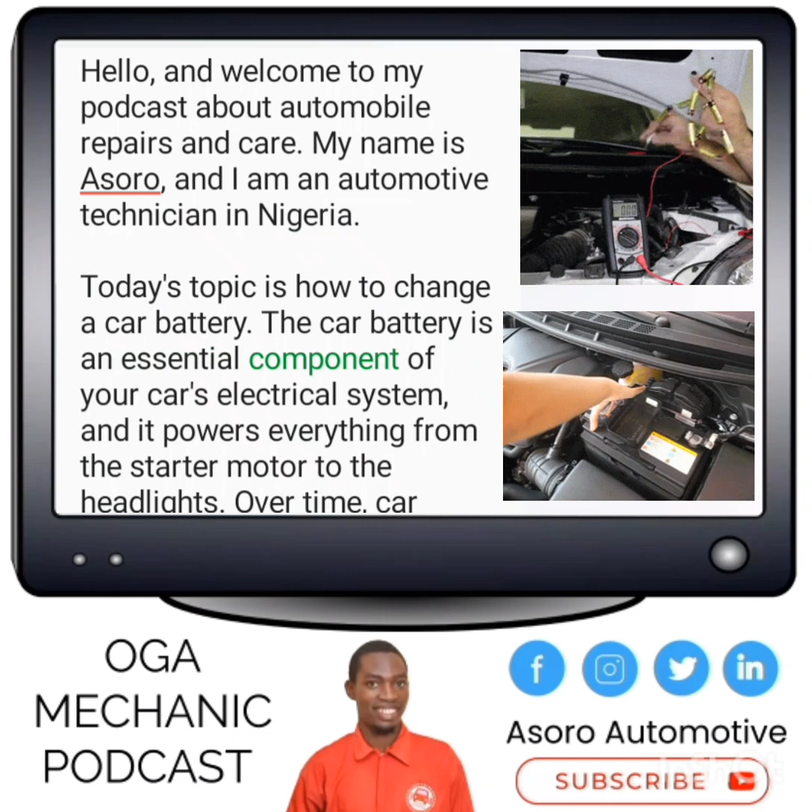Today's topic is how to change a car battery. The car battery is an essential component of your car's electrical system, and it powers everything from the starter motor to the headlights. Over time, car batteries can lose their charge or fail completely, and it's important to know how to change them safely and correctly. Here's how to change a car battery.

Gather your tools. To change a car battery, you will need a few basic tools, including gloves, safety glasses, a wrench or socket set, and a wire brush.

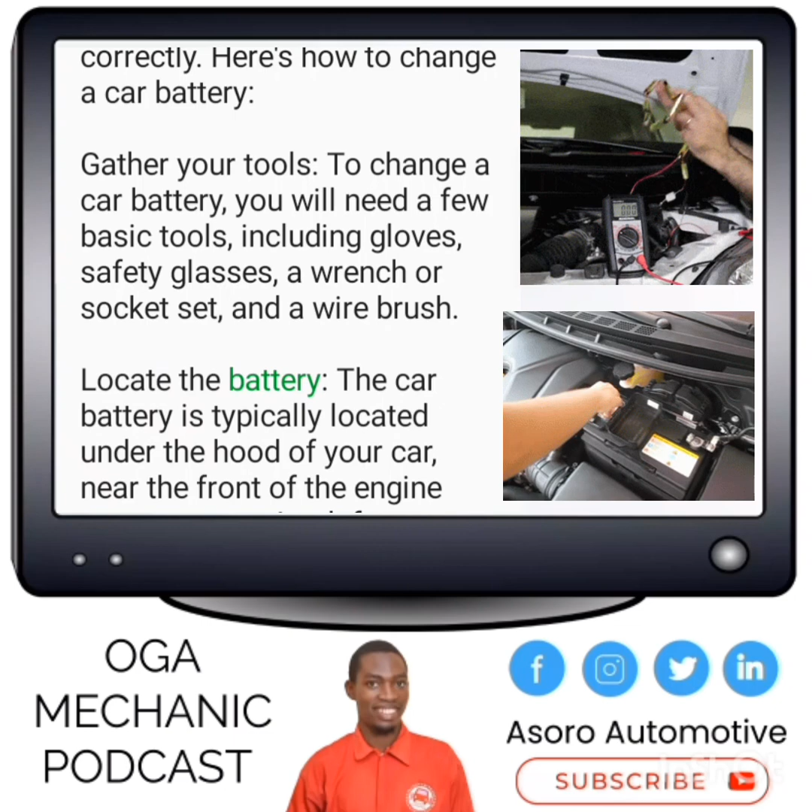Locate the battery. The car battery is typically located under the hood of your car, near the front of the engine compartment. Look for a rectangular box with two cables attached to it. This is the battery.

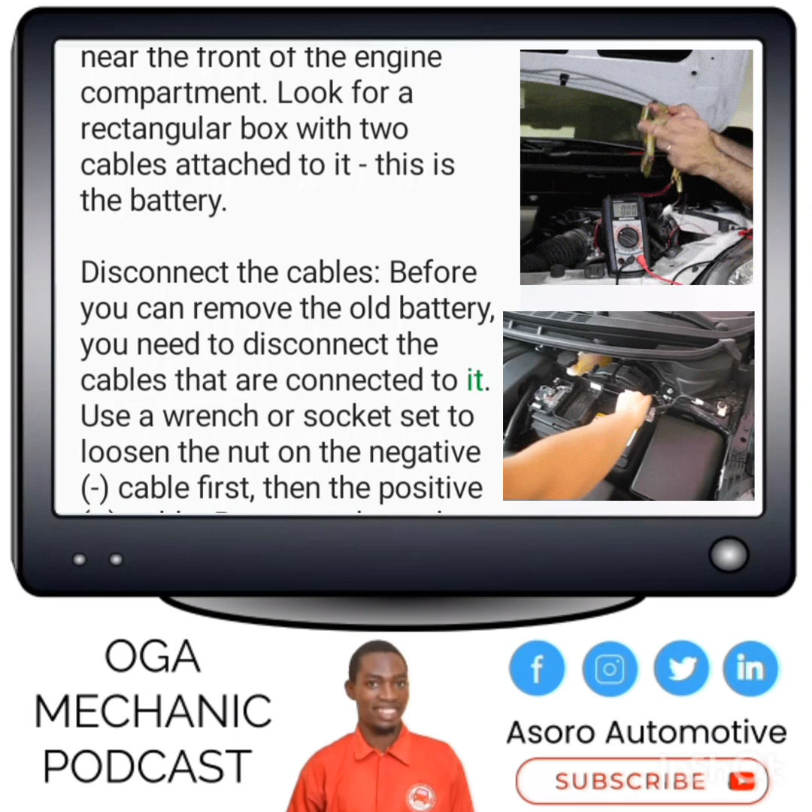Disconnect the cables. Before you can remove the old battery, you need to disconnect the cables that are connected to it. Use a wrench or socket set to loosen the nut on the negative cable first, then the positive cable. Be sure to keep the cables separate and away from the battery to prevent them from touching and causing a short circuit.

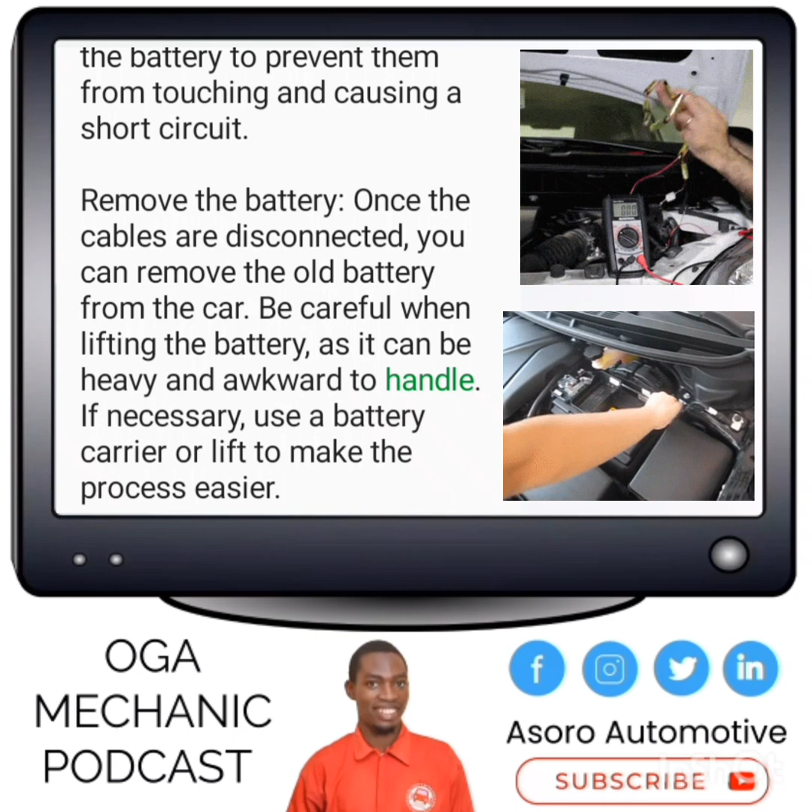Remove the battery. Once the cables are disconnected, you can remove the old battery from the car. Be careful when lifting the battery, as it can be heavy and awkward to handle. If necessary, use a battery carrier or lift to make the process easier.

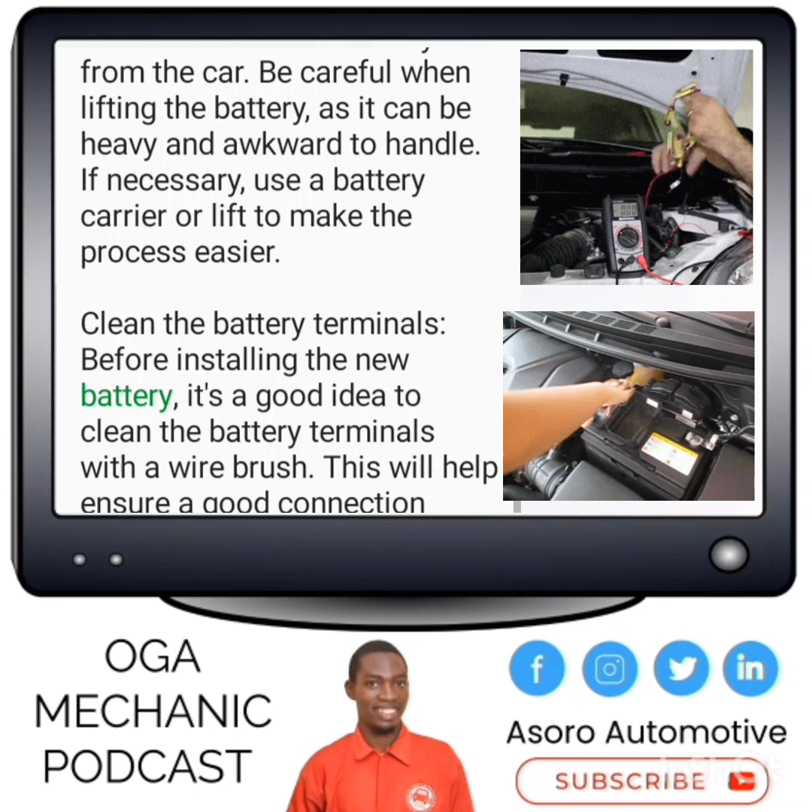Clean the battery terminals. Before installing the new battery, it's a good idea to clean the battery terminals with a wire brush. This will help ensure a good connection between the cables and the new battery.

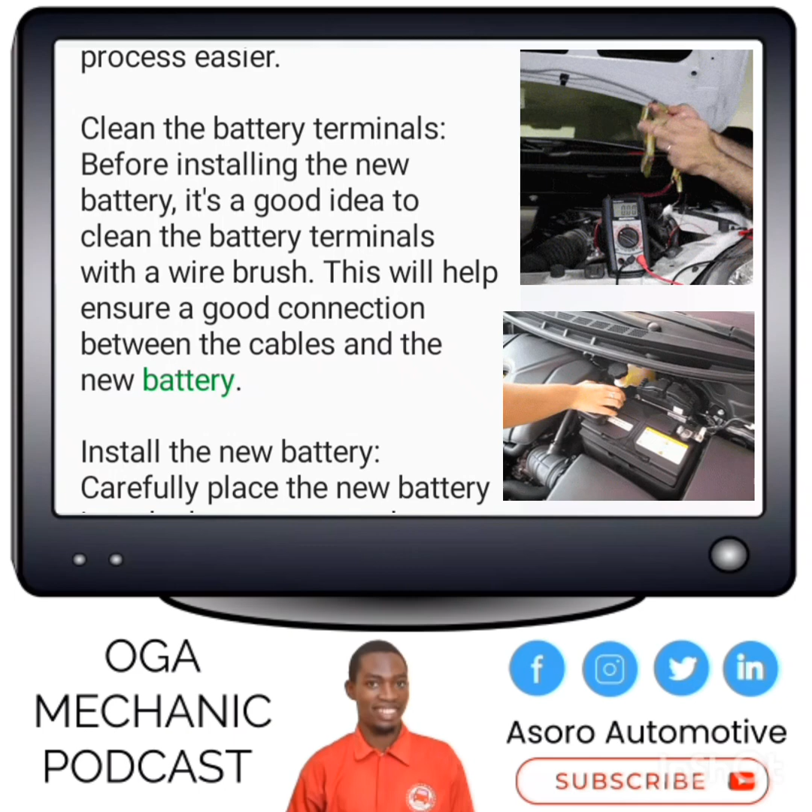Install the new battery. Carefully place the new battery into the battery tray and secure it in place with the hold-down bracket. Connect the positive cable first, then the negative cable. Be sure to tighten the nuts securely, but don't over-tighten them.

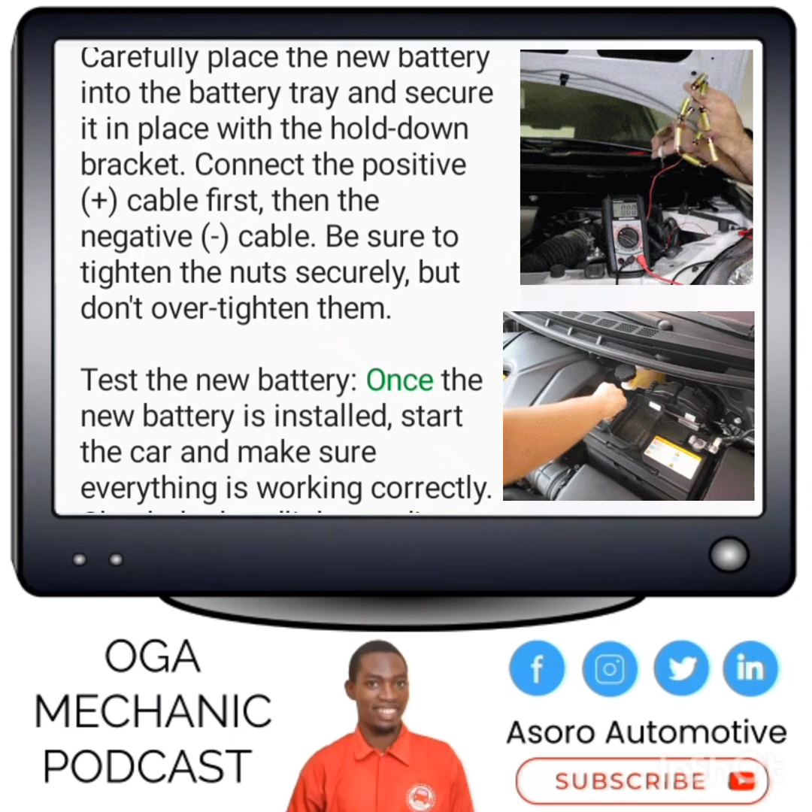Test the new battery. Once the new battery is installed, start the car and make sure everything is working correctly. Check the headlights, radio, and other electrical components to ensure that they are functioning properly.

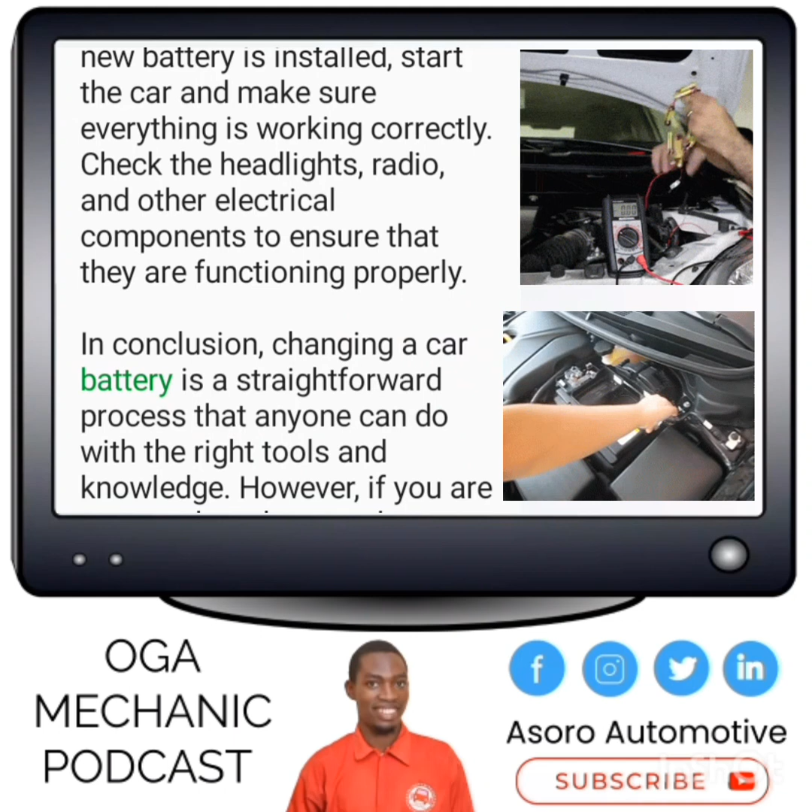In conclusion, changing a car battery is a straightforward process that anyone can do with the right tools and knowledge. However, if you are unsure about how to change a car battery, it's always best to consult a professional mechanic for assistance.